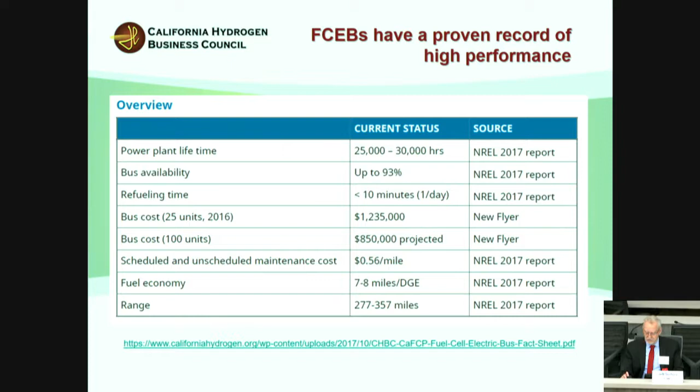So this session, having already with Jamie's session yesterday talked about the cost of hydrogen, and it is an issue that needs to be and is being addressed, this session will really talk about developing infrastructure at scale, much like the last session did for battery electric vehicle charging. We're going to talk about how that scale is developing here and elsewhere, that there are multiple pathways, we have multiple people. You notice none of the people on our panel are transit agencies, for right or wrong. These are people who are delivering equipment and services to you as potential fuel cell electric bus users.

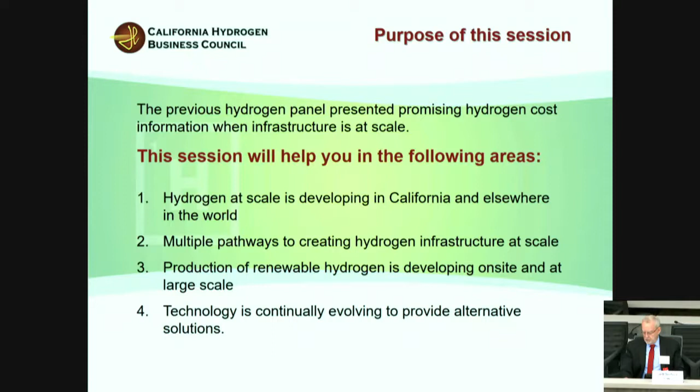The production of renewable hydrogen is developing. It's very important, and as an organization we have committed, as the Hydrogen Council, Worldwide Hydrogen Council, is committed to zero carbon transportation fuels very soon. What's the year, Jamie? 2030, I believe, the Hydrogen Council. And then the technology is developing. You're going to hear several people developing, or telling you about, their view.

So we're going to proceed with the first speaker. We want you to hear enough in this session to become convinced that fuel cell electric buses have to be part of your evaluation of how you meet the ICT regulations. So first, on my left is Chris Kretz from Air Products and Chemicals.

Chris? Okay, like that. Good morning, everyone. Thank you, Jeff, for having me on this panel. Thank you to ARB for allowing us to have this forum to talk about hydrogen and scaling up hydrogen for transit agencies. We're going to try. Okay, great.

So getting started, a lot of you may be wondering, if I was even thinking about hydrogen and fuel cell electric buses, how would I get started? There's a lot of folks here who can help you understand the buses, but just from the bus perspective, you really want to understand about the fuel cells, about the fuel cell electric bus, about the hydrogen, and know that there are a lot of agencies and companies who are willing to help you get started. And so all you really have to do is contact, from a hydrogen fueling perspective, contact folks on this panel and some of the other panels you've seen.

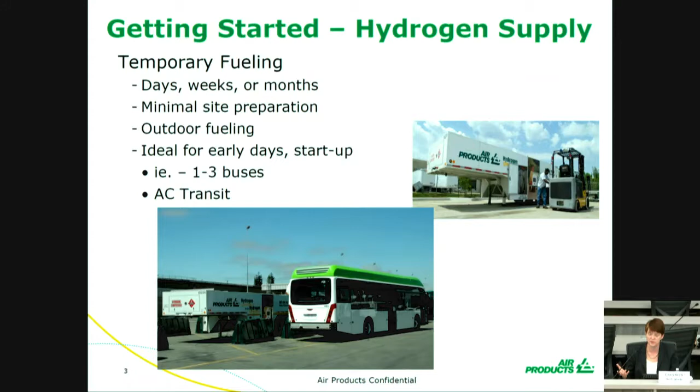I will be frank about that. But if it's meant to just get you started and try it out, it may be a good way to go. This would be outdoor fueling with minimal site prep.

Then from a scaling perspective, that's when you start to get a little more complicated. But again, I would venture to say not as complicated as some of the things I've been hearing about for other alternative technologies. There are options though, so that's where a dialogue needs to start. I heard a lot of discussion earlier and yesterday about planning. Yes, it requires planning, but we and others can help you do that by just walking through what the options are.

The options for hydrogen are liquid hydrogen, or making the hydrogen on site—whether that be reforming, electrolyzer, or even trigeneration—or pipeline hydrogen. There is also gaseous hydrogen, much like we talked about in the temporary supply, but that's probably one of the more expensive routes to go in terms of scaling up.

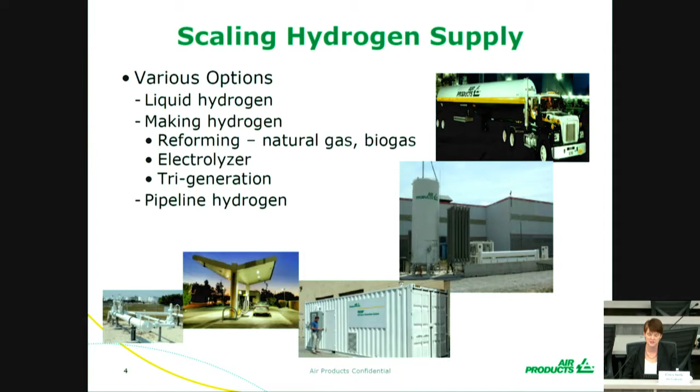I just want to point out some of the pictures on the right. That's a liquid trailer, that comes and delivers liquid to a site. Below it is a liquid station, pretty straightforward. Then below that, in the middle, is a reformer container. To the left of that is the Shell Torrance station, which we built for Shell some time ago, and it is a pipeline station. So it's not anything exotic, it's just fueling as you would see it in Shell Torrance. The last picture on the left shows you some typical pipeline setup.

In terms of what we feel is one of the best technologies for transit agencies and for scaling up—and we're a bit biased because we provide this technology and we have the supply—liquid hydrogen, delivered liquid hydrogen to a site, is one of the most versatile ways of providing hydrogen to a transit agency.

So what I've shown here is a picture you've seen previously. This is the station that Trillium and Air Products are putting into Orange County. It is Air Products' design and key equipment, and it's designed for 10 buses initially, but this can easily fill 20, 30, 50 buses. Then with minor modifications and some added equipment, it can go to 100, 150, or 200. As long as you have the footprint to put in that additional equipment, you can have a station that's expandable up to 200 buses.

The nice thing about that is it's an additive cost to you to scale up, not a multiplicative one, and I think that's an important point to think about as you're considering technologies. The planned on-stream date for this is spring of 2019, so it's in progress and being built, and I'm looking forward to seeing that online.

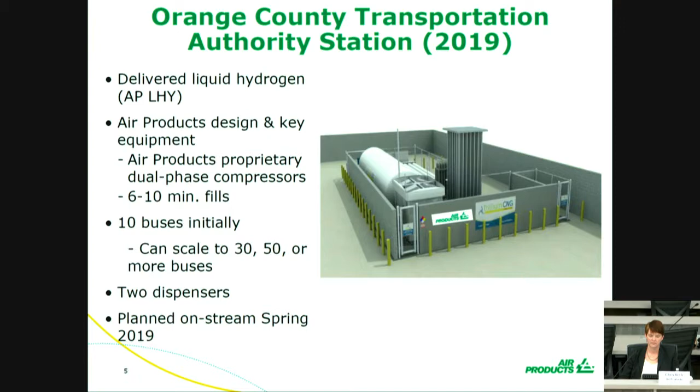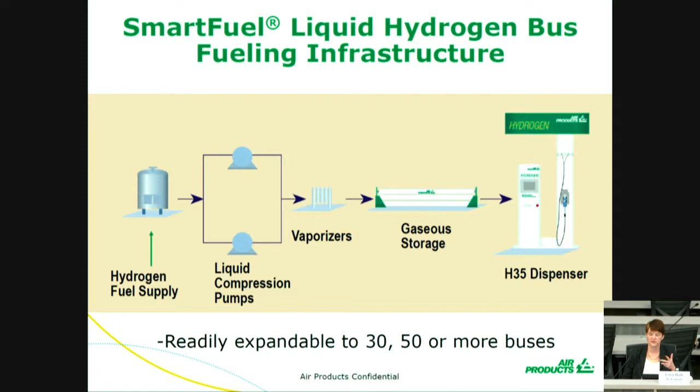If you're just looking to know what the components are of this SmartFuel station, it's pretty straightforward. It's a liquid tank over on your left, some compressors over to the right, vaporizers, some gaseous storage, and dispensers. It's pretty similar to what you might see for a CNG station—very, very straightforward and readily expandable.

If you think about a pipeline station, it actually has very similar building blocks. I think people get a little nervous—pipeline, that sounds complicated. And really it's not. You put in the pipeline, that's probably the most complicated part, I won't argue with you there. Then you have a purifier on the end because pipeline hydrogen is not at the right purity for what you might need. But everything else follows from that, very similar to a liquid or gaseous station: you have compressors, gaseous storage tubes, and dispensers. So it's pretty straightforward.

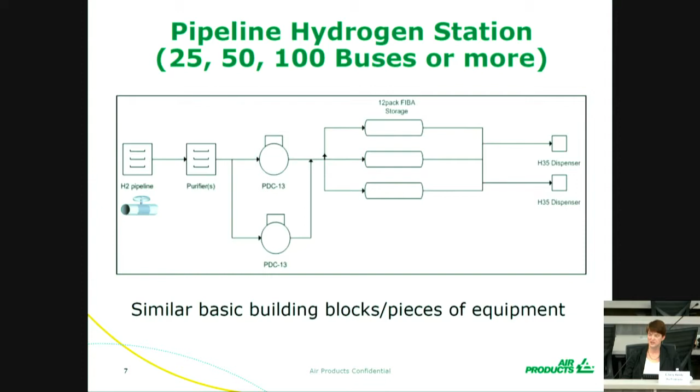And it can easily meet the needs of 25, 50, 100 or more buses.

Another option that Air Products offers is we have hydrogen generation technology at a small scale. This is a smaller version of what our plants are in Wilmington and Carson. The nice thing about that is we sell it in different modules—one for 20 buses, one for 40 buses, one for 60 buses. These are containerized packages and could be installed fairly readily because of that. It will end up taking up more footprint than a liquid station, but if you have that interest in generating on site, that is an option for you.

This can be done via on-site generation, and can also be done via electrolysis, which one of our panelists will speak to you about as well.

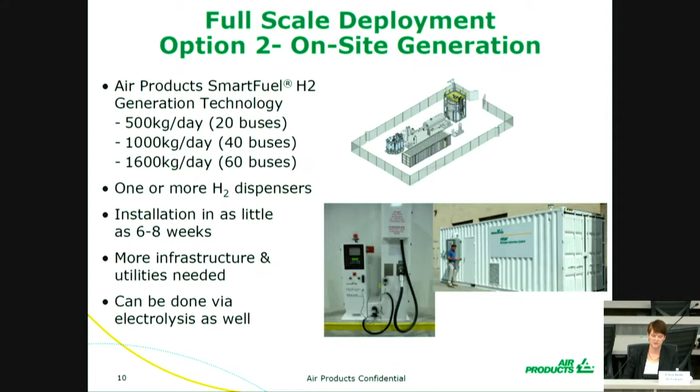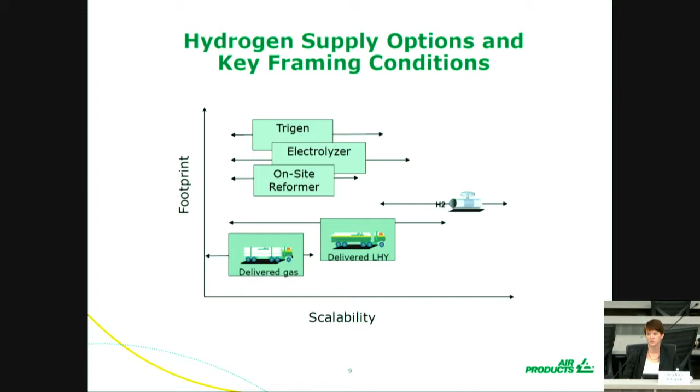Finally, the slide I'll leave you with is one I showed yesterday, but just to reiterate—some of the considerations you need to think about are scalability and footprint. What this shows you is, depending on what you have at your site, if you've got a decent amount of real estate, you probably have more options. But if you have limited real estate, you really need to think carefully if you want to scale up to larger volumes and amount of buses. And again, that's where delivered liquid really becomes a nice choice. That's it, thank you very much.

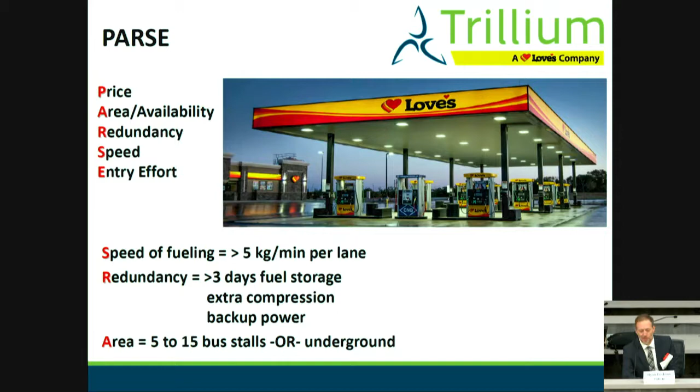The square footage these systems take, I think we can provide systems that will take somewhere between 5 to 15 bus stalls. I give it to you that way so you know what you're losing, where you'd have to move your contingency buses, or whatever. But the system can go pretty much anywhere on property, it doesn't have to go in any particular location, it's whatever's most convenient for your operations. You'd lose somewhere between 5 and 15 bus stalls. There are ways to take up less space, maybe underground systems, and I'll let other people on the panel talk a little more about that in a second.

All right, good deal.

Just real briefly, there's a lot of repetitiveness here at this point, so I'll cruise through a few slides. You have the option of having hydrogen delivered in, gaseous or liquid, or producing it on site via electrolysis or SMR. We've talked about this a little earlier and yesterday, so I won't go into it much more. Once you do that, there's the compression, storage, and dispensing that's roughly the same regardless of your choice. If it's delivered from off-site, the way it was produced is pretty much the same at a smaller scale, those same electrolysis or SMR systems.

So, can you go back a slide maybe? Thank you.

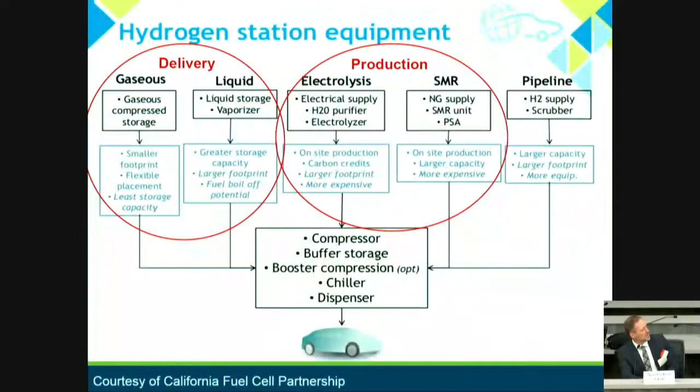So the entry effort, I don't want to spend a lot of time on this, in fact you'll see the same exact slide from Air Products. One thing I do want to say is that unfortunately, when going from a demo fleet to at scale with hydrogen, it may not make sense to have the system on day one that you want on year 2 or year 10. It might make sense to do an entry level effort, maybe gas tube storage that comes in and out on a daily or several day basis. That might not be the solution you use after your first 3 buses have proven themselves and you've decided it's time to start transitioning the fleet, and your next order should be 10 or 15 buses. So you might have a different solution for the first months and or year or 2.

And I think that should be considered okay. I think there are pretty low cost options for these lower cost entry systems. You do pay more per kilogram for the fuel, but the system itself is pretty easily installed. Not a lot of cement, civil, mechanical, and electrical work needed for those systems.

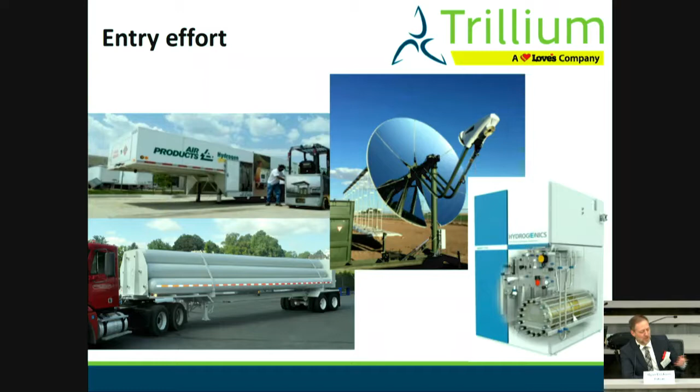So here's just a couple different examples of some systems. Again, hauling in gas is probably one of the more common ways to do it. There are some new vendors or OEMs out there producing new equipment that might be pretty cool, like solar reactors and all that kind of stuff. So let's see if I can.

And a couple more systems as well. You can get these storage tube systems where they are fully self-contained and have all their power on board, so they're really quite simple and easy to use.

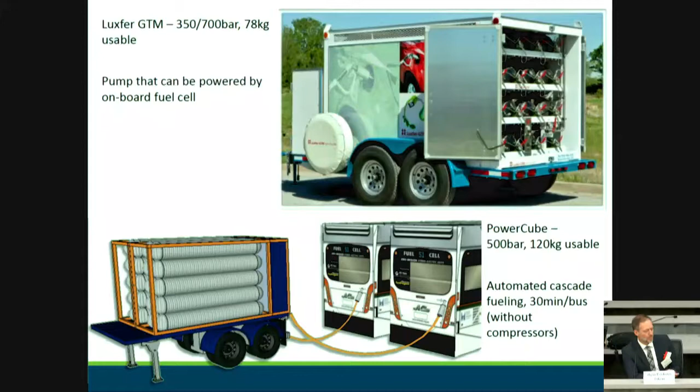Next slide, thank you. All right, so just a couple examples for scale up. This is for a customer that isn't a customer yet, but somebody we've been talking with very closely, a California Transit Agency where they have a fleet of around 180 buses on a particular site. It's a very small, very tight site. They have slightly shorter routes, so they maybe don't run quite as many miles per bus per day as OCTA does. So they would be able to do 180 buses.

That's 180 buses total with their spare ratio, fueling maybe 150 to 155 buses a day. They can do that with around 3,000 kilograms per day of hydrogen. Our solution there would be to put in 2 liquid hydrogen storage tanks and associated compressors, vaporizers, and dispensers to meet their needs, taking up maybe around 10 bus stalls.

And you can see this, maybe you can't tell what you're looking at, but the 2 long things are the tanks, horizontally situated, about 40 feet long each. Depending on where on the property and what the zoning or permitting requirements would be, you might even be able to do those tanks vertically. Chris had a picture of a vertical tank, which takes up a lot less space but is taller, so maybe you don't do that right up against the edge of the property.

But in the worst case situation, we think we would only take up about 10 bus stalls. We think that station would cost them around $6 million, and that would fuel their entire fleet of 180 buses, at 5 kilograms per minute, fueling multiple buses at a time, basically the same exact operations they have today with diesel.

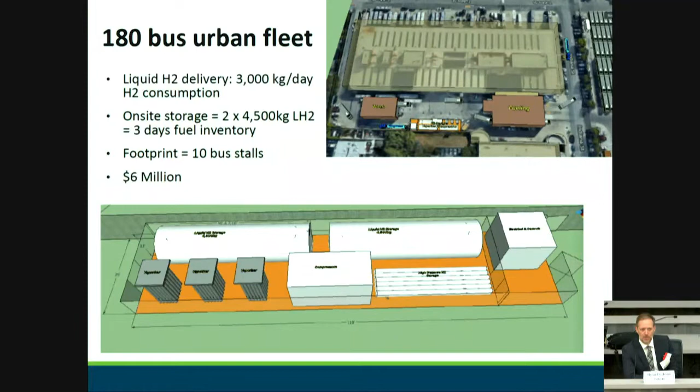And you've already seen the OCTA slide. I won't spend a lot more time on it, other than to say that site took up around 8 bus stalls. We think we could double that capacity without having to take another 8 bus stalls. That's the scalability we're talking about here. That was a $4.7 million project with CARB funding, which did include 3 years of warranty and maintenance.

So the actual CapEx costs, if we were to build that same site again without the warranty and maintenance built in, would be less than that. And then, like I mentioned yesterday, and Bill Zobel mentioned yesterday, if we had to expand that, maybe double its capacity, it would not be another 4.7 million, wouldn't be another 3.7 million, it would be a much smaller number than that to double that capacity.

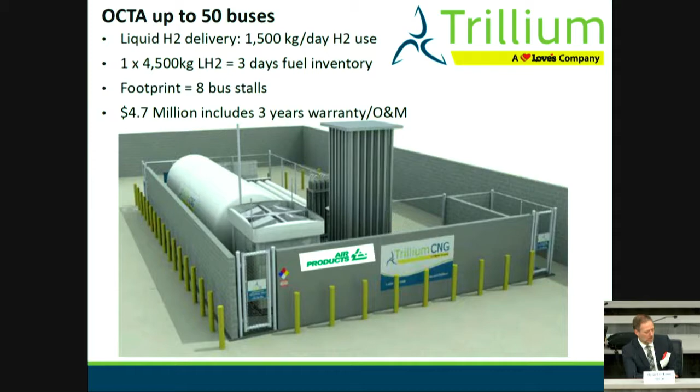That's it, thank you very much.

Great, thank you. I'd like to again thank CARB for putting on this workshop. I think this is a really, really important activity for the whole industry. I'm going to focus on electrolysis as a scalable hydrogen supply solution for transit fleets. Just on this first picture, I want to make 2 comments. I'm going to talk about centralized production of hydrogen from electrolysis and how that can work into a transit model.

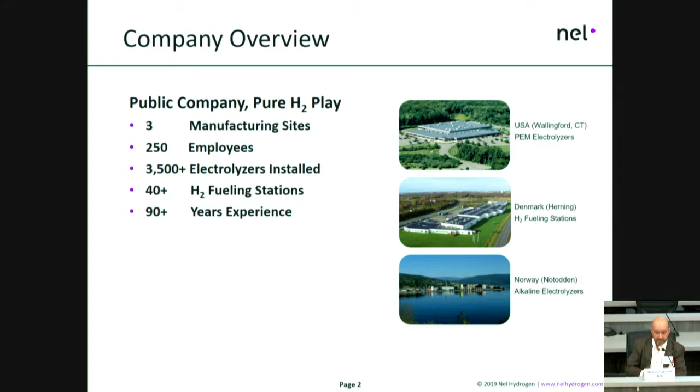Our company is based in Norway. I work at the US subsidiary in Connecticut, where we produce PEM electrolyzers and have for more than 20 years. But we also have our alkaline electrolyzer factory in Norway and a hydrogen fueling station factory in Denmark. So we actually produce not only the electrolyzer equipment that produces hydrogen, but also the fueling equipment, both 350 bar and 700 bar fueling equipment that can be installed at your fueling sites.

So just really quickly, these two cartoons show the two types of electrolyzers that we produce. Fundamentally, they do the same thing. The inputs are electricity and water. And if your electricity is coming from green, carbon-free sources, then your hydrogen is what we like to refer to as green hydrogen.

Both technologies that we produce have their pros and cons in terms of how we choose one over the other. But fundamentally, we offer a complete portfolio of electrolyzer capacities from very small to very large, as I showed in the first picture.

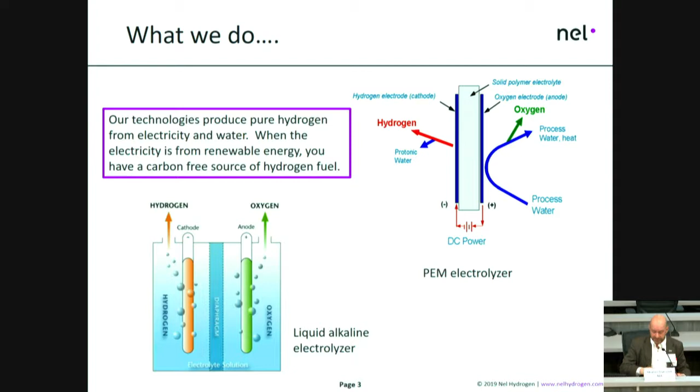So the first thing I mentioned was the modularity of electrolysis, and I'll use the example of the electrolyzer we're installing at Sunline Transit as an illustration. We're installing an electrolyzer that will produce a little over 900 kilograms per day of hydrogen at that site, enough to support about 26 buses. That particular electrolyzer system has 8 modules installed into it, so there's 8 cell stacks, and each cell stack has a dedicated rectifier to provide the DC power to drive the stack. Now, I could install half as many modules and get a 450 kilogram per day electrolyzer, and then upgrade that in the future.

So when I look at how I could grow a system like this, where you start with less capacity and add to it, you can do it very cost effectively, because the balance of plant is already installed, and now you're simply adding internal modules to that. So to go from 450 to 900 kilograms per day is less than 50% of the initial capital cost. That's just one of the ways that this technology allows you to scale on site more cost effectively.

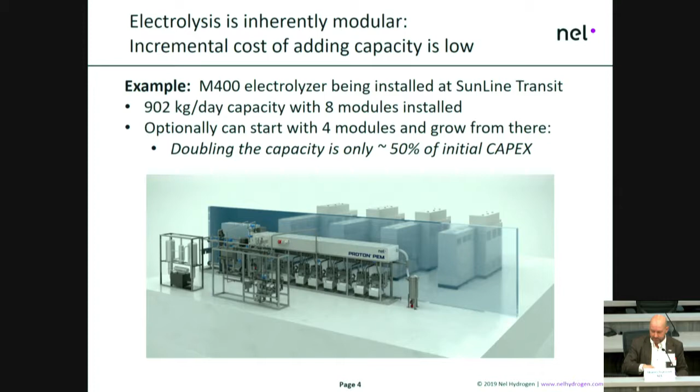So just to introduce the concept of how we think centralized production can be a cost-effective model for transit fleets. The picture at the top shows a 50 megawatt electrolyzer producing about 25 metric tons of hydrogen per day. That's enough to support about 1,000 transit buses, maybe 500 Class 8 trucks, and maybe 40,000 cars.

The difference is, for cars, I need more of a network to support those vehicles, so I need multiple fueling locations, whereas for transit and truck type fleets, I can have depot fueling where you're fueling in one location. So you get better utilization of the equipment, and more efficient management of the hydrogen supply.

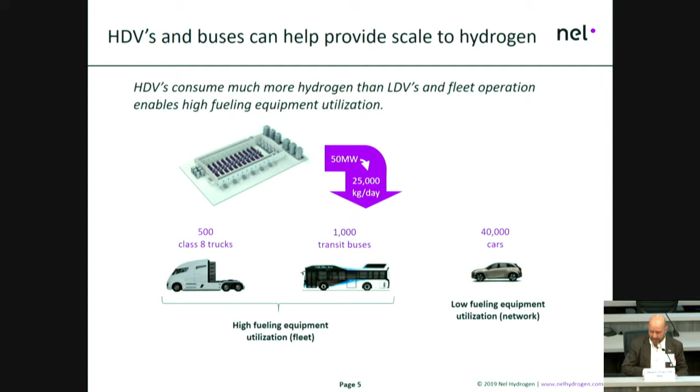So just to illustrate that a little bit, the curves at the top you've seen before, I think, where the cost per bus goes down with fuel cell infrastructure as you increase your fleet size.

And to illustrate that along the bottom, these are our projections, and I'll apologize in advance for the NOK currency - that's Norwegian kroner. 85 NOK is a little over $10 a kilogram for the conversion, just to help.

But as you go from 10 to 50 to 150, you have a nice reduction in the dispensed cost of hydrogen for your operation. So as we scale, those projections match up pretty nicely with the curves above.

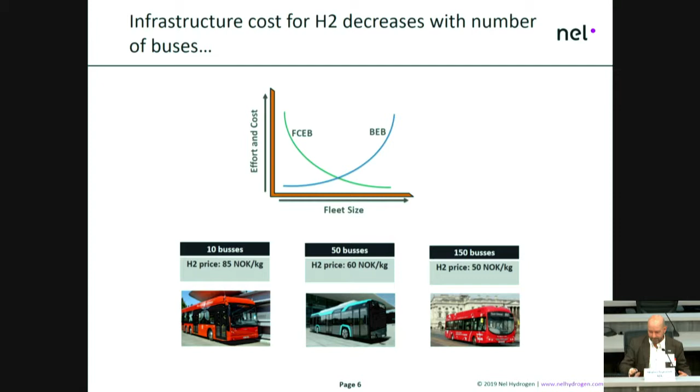So to illustrate this, in Norway we are building out infrastructure to support transit fleets there. The idea is centralized production with gaseous distribution to a perimeter of fleets. We're taking advantage of high pressure trailers that are allowed on the road there to help make it an efficient and cost-effective delivery solution.

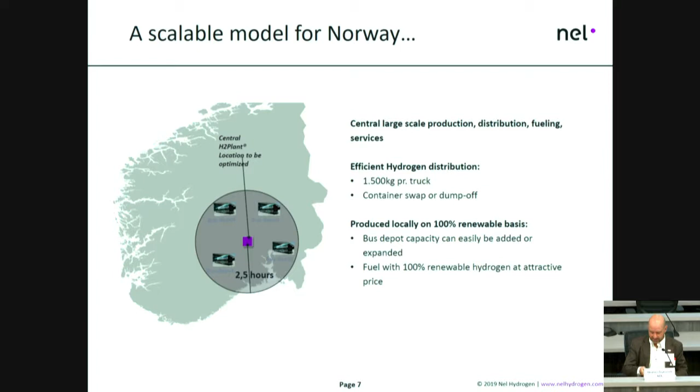So just to show you how this scales, for a relatively small fleet, say 30 buses, we're showing how the equipment would lay out. We've got this purple box that shows our fueling equipment on site, and next to that is basically a trailer lane for dropping off trailers of compressed hydrogen.

The dispensers can be remote from the rest of the station equipment - we say up to 100 meters away from your primary station equipment. So for this model here, we're talking about maybe 60 square meters to support 30 buses, just with this drop and swap kind of delivery method.

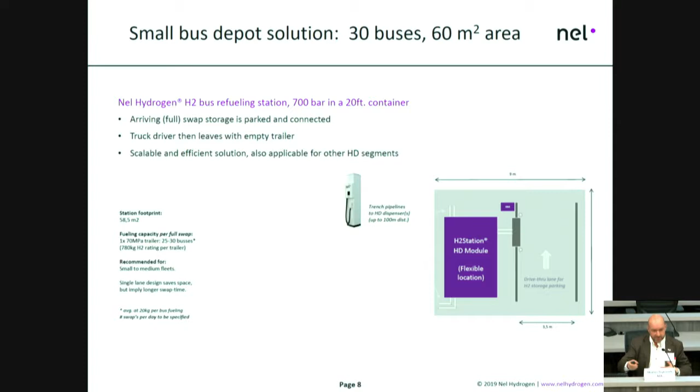Let's see how this scales up to 150 buses. The way we address higher capacity is with more trailer lanes, so you'd always have a couple trailers hooked up providing hydrogen, plus maybe a third lane always available for swapping. To go from 30 buses to 150 buses, we go from roughly 60 square meters to 200 square meters, and again you can have multiple dispensers set up remotely from the primary equipment site.

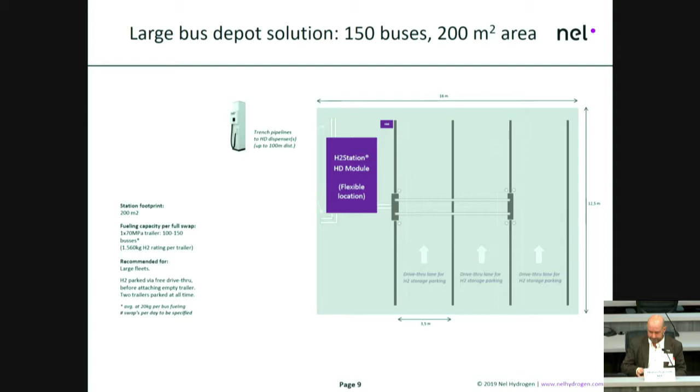The new solution is centralized production using low-cost hydropower, which they have in Norway, and we're going to be supporting up to 150 buses, about 3,000 kilograms per day. The footprint goes from 350 square meters down to 200 square meters, because we're doing this drop and swap model.

The cost goes from about 110 NOK per kilogram down to about 50 NOK per kilogram, so increasing capacity 10x and cutting cost more than in half. That's enabled by two key elements: the high pressure drop and swap technology, along with the centralized production facility of an electrolyzer.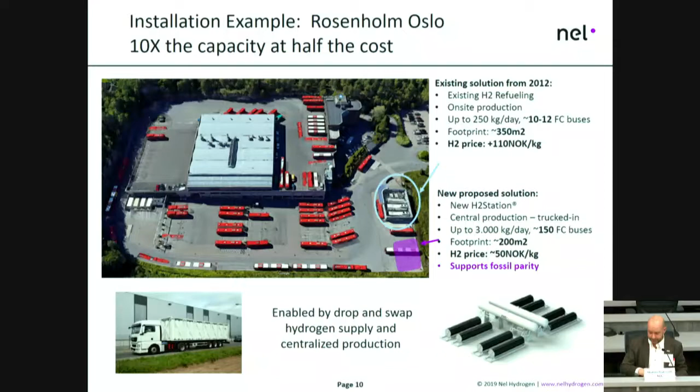Just the last slide I wanted to cover is that today, when we compare hydrogen for fuel cell buses relative to diesel, we're already very close to cost parity on a dollar per mile basis. This is just some numbers here you can look at when the slides get distributed.

Ryan talked yesterday about getting down to $5 a kilogram. If we can get down to about $5 a kilogram, we are at cost parity with diesel buses on a dollar per mile basis, and we think that is very achievable today.

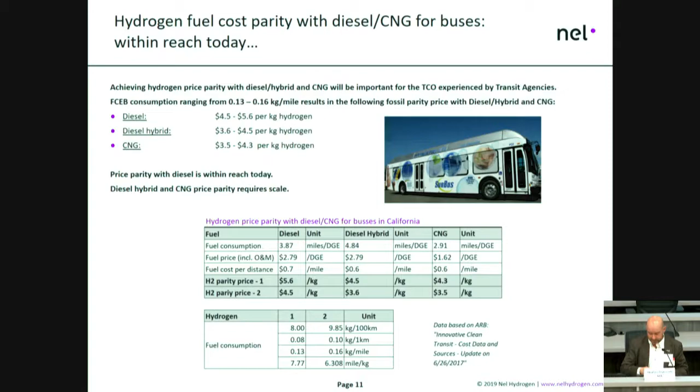Diesel hybrids and CNGs need a little bit more scale to be realized in order to get the cost down to parity. But the encouraging thing is the cost trajectories we see, and how right now we're already within striking distance on diesel buses. That's it.

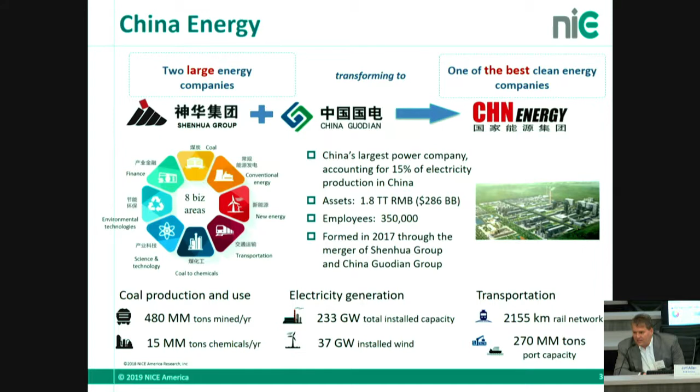One of the other interesting things—Al asked a question about curtailed wind yesterday, and I think it was a couple hundred gigawatt hours or something like that. China Energy actually has over 10 terawatt hours of curtailed wind in China. Right now it's out in the middle of nowhere, so we're trying to figure out what to do with it, and of course, utilizing hydrogen. Unfortunately in China, liquid hydrogen isn't approved for transport, so you're stuck with gaseous hydrogen, and the distance to where this curtailed wind is, is so far that gaseous isn't practical. So you really need liquid to take care of that if you were to utilize hydrogen as a solution.

So who is NICE? NICE is a group of researchers, in excess of 400 researchers over in Beijing, another 20 in the US, 150 over in Schwabisch Hall outside of Stuttgart, Germany, where we did a joint venture with a CIGS solar company. We are the clean tech incubator for all of China Energy.

So one day I'll be working on new materials based on coal byproducts like plastics. Others I'll be working on natural gas proppants. Other days I'll be working on hydrogen, carbon capture, all of the above. So we have a very wide mandate, including distributed energy, so new battery materials. It's pretty wild, a little overwhelming, but pretty fun. So we're working on various things.

It was originally constructed 10 years ago as foreign experts. So a lot of our DNA and executives and team on the senior side comes from GE Global Research, Air Products, also Dow. We have a lot of distinguished folks and tremendously experienced within our hydrogen team here in the States. We have one of the leaders who set up a lot of the stations for Plug Power, also one of the leaders who set up a lot of the stations for Linde. So we have tremendous experience base in the team we're working with here locally.

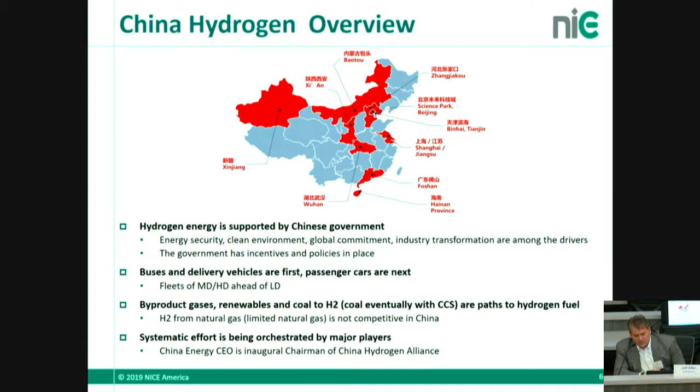So to give you some perspective on what we're working on: our aspiration is very much consistent with Ryan's, and we've done a deep techno-economic analysis. Obviously, these production numbers we're showing are more on our internal production capacity over in China. We've consulted and kept a very low-key activity with the people we want to know about us here in the States. Others we have worked through, so some of the transit agencies have heard about this concept of underground - that's actually us doing the technology there.

So we see, at the industrial gas companies and also our internal production capability, we foresee the future of $3 per kilogram. And if you now look at the rest of the bill, how it adds up, with our target of a $4.50 per kilogram pump price. So very aggressively as far as that goes, and we foresee a future where that is definitely possible, and are working on principally the production over in China and also the refueling here in the States and in China.

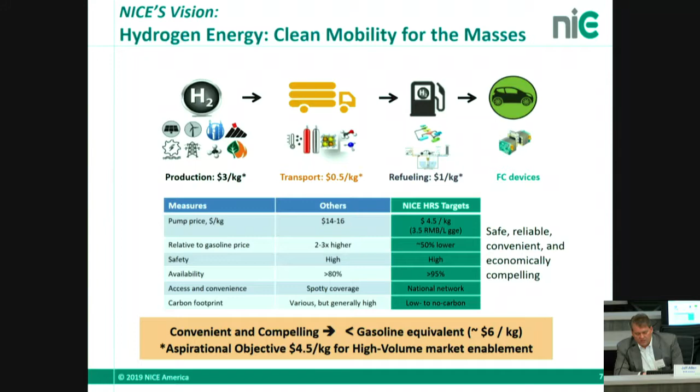So what are we doing about that? Within China Energy and NICE, we have a sister subsidiary called Shenhua Hydrogen. They are committed to building 200 to 300 hydrogen refueling stations, very large capacity refueling stations, and it's all self-funded by us. We're committed and very aggressively pushing forward that. They're all going to be 1,000 kilograms per day or more.

We're also looking at molecule production. Within the NICE portfolio, our team over in Beijing is working on gaseous infrastructure equipment development, stations for gaseous, since liquid is yet to be approved. We're also working on codes and standards and driving those codes and standards so that liquid can be approved. You can also start to consider reduction in footprints based on safety and being smart and standing on top of all of the expertise that's been created throughout Europe, the US, and Japan on safety standards and protocols for hydrogen. So we're incorporating that and pushing it forward as fast as possible in Beijing.

Here in NICE America, we're located in Mountain View, immediately adjacent to a small company called Google, in case you've never heard of them. We're working on liquid development. We have 20 folks in total. About 5 or 6 of us are working on the hydrogen team. We have some really interesting partners that we're active with.

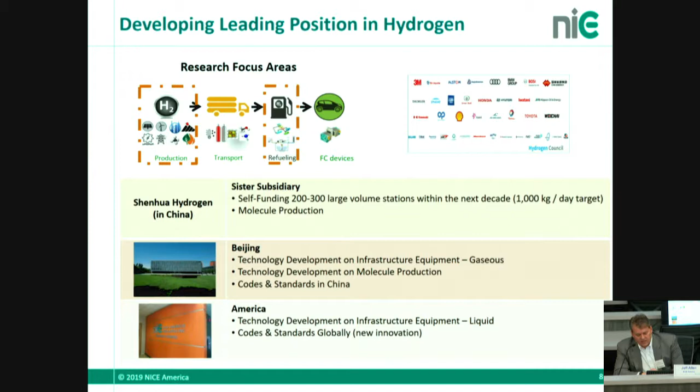Come on, change the slide.

So as I said, we're building 200 to 300 hydrogen refueling stations. Our first step into that is in a city called Jiangsu, Rugao. It is on the outskirts of Shanghai, and we're in the midst of building that station right now. It will be fully commissioned, expected spring of 2019, and the nameplate capacity is 1,000 kilograms a day, with 586 kilograms of on-site storage and the remainder being drop and swap.

The equipment utilized for that is principally Air Products equipment, and you can see it's a dual pressure capacity. So it's principally for local transit agencies, but definitely for consumers, although there's not a lot of light-duty vehicles in China currently for hydrogen. They're in development by various companies like SAIC, BAIC, Great Wall Motors, and various companies that are producing those right now.

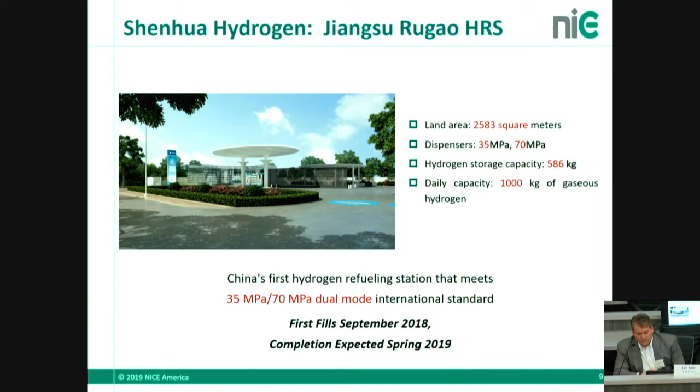So, as I said, our vision at NICE America is actually a full station transformation. We are pushing underground technology. As Ryan and Steve and Chris said earlier, what this means is if we can implement this, and we're in technology development, so it's not done today, and I will not try to sell it to you yet today, but this is our vision, what we're implementing, and we have tremendous partners that as we get a little further forward.

I'll talk about the names, but the entity we're principally working with where we're getting our liquid hydrogen pump is utilized on virtually all of the large heavy-duty truck LNG systems. So it's extremely well known and very trusted in the industry. We foresee underground as the future.

The beauty of it is now you can take a station that has 8,000 kilograms capacity or much, much larger, and now have roughly, for an 8,000 kilograms a day station, roughly a footprint above ground of about 20 by 10. Because all you have is hydraulics, control systems, and a vaporizer. Nothing else. Compressor's gone, cascade tubes are gone. All you have is a tank and the pump and tank concept.

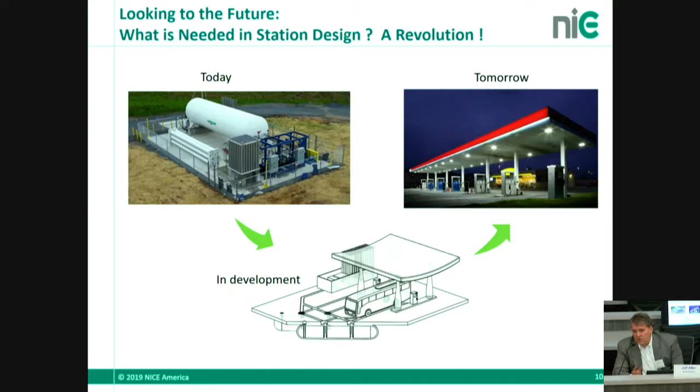The beauty of that is now you have a pump and a technology where you have zero boil off. So if you check the boxes and look at what is the required transformation to enable, independent of the cost, obviously, if you look at the station specifics, what are they? You want something that's high reliability. A lot of it today is good equipment, but it's in the early stages. And now as this industry matures, you'll see the transformations.

And the goal for us, both from a footprint standpoint, from a user standpoint, and also a performance standpoint, is the same as your diesel or LNG based buses. That is the goal and the vision we have, and we're driving towards right now.

Further, profitable station, obviously dollars per kilogram and very large capacity, and zero boil off, so it tremendously improves your OpEx. Minimal footprint above ground. Because we eliminate cascade storage and the like, we're doing direct fill, very fast fills. Our pump capacity is targeted at 230 kilograms an hour, and because it's in the cryogen at all times, you don't have a remote location where you're mixing between gas and liquids in the pump, and therefore slowing down the speed of pumping.

Can you wrap? Yeah, wrap up. Okay.

I would if the slide would move.

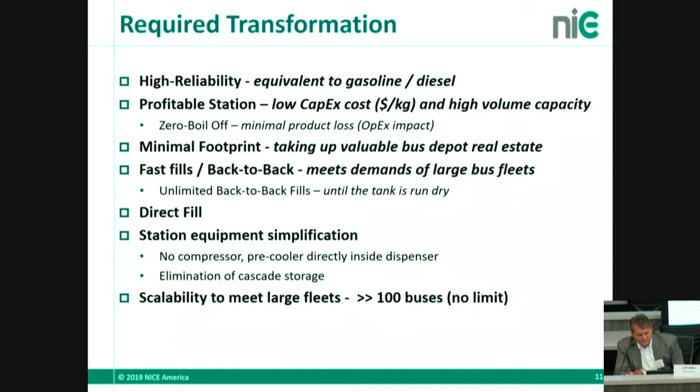Our initial iteration is for a bus application, so 35 MPA dispensers. Above ground, our technology development timeline, we're going to have our equipment complete and start testing in Q3 this year. We're going to look to do a demo station middle of next year.

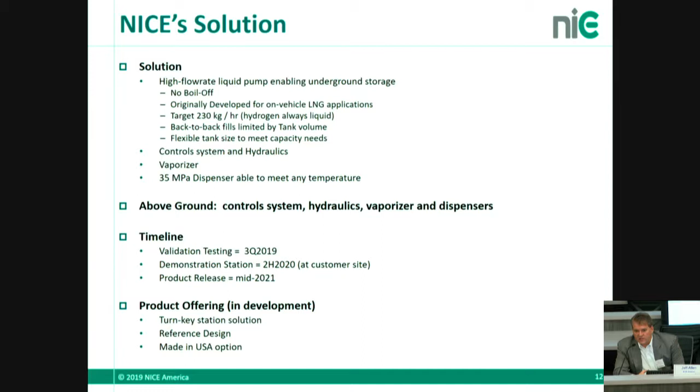Can't guarantee it will be in the States, but more than likely given the liquid limitation. So we are considering, exploring, and thinking about who we might want to partner with to do a customer-sited demo. We're also, of course, going to have Made in USA so that it meets the needs of the local transit agencies.

One last thing I'd like to say, and this is something we're working on in conjunction with California Fuel Cell Partnership, is we think this transformation and vision is the future of the entire industry. We'd like to make a call to arms of people who would like to partner with us and work with us to really deliver on this vision.

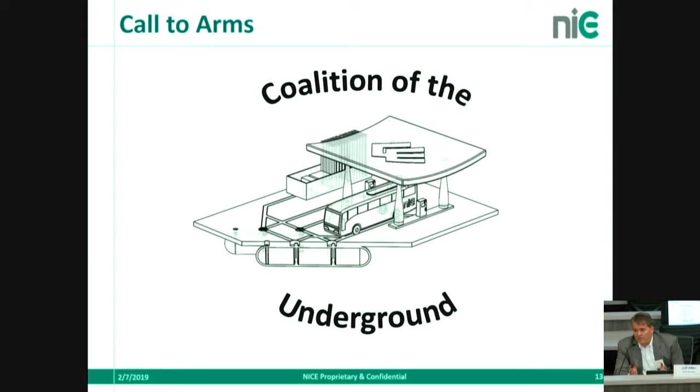The leading light-duty folks very much believe in this, but also as I talk to various people, including some on this panel, everybody sees the vision and agrees that this is the future of the technology. So we'd like to push this out in a non-commercial way and get as many people, including transit agencies, involved so that we can move as fast as possible to deliver on this vision. Thank you very much.

Who is Plug Power? Many of you know who we are, some of you don't. We are a leader in hydrogen and fuel cell technology. Our business, and we're about to announce results, our revenue for last year is going to come in just north of $180 million. That is primarily in two areas: supplying fuel cell hybrid electric drives to forklifts, to material handling business, and also providing the fueling infrastructure that supports that.

Those two go hand in hand. If you take anything away from this discussion today, understand that the infrastructure is closely related to the vehicle technology, and one doesn't happen without the other. You've heard everybody make that point very poignantly, and that is very key to Plug Power's evolution and to our claim that we have this capability, because we had to get into the hydrogen fueling business.

We had to get into that infrastructure because our customers, you'll see in a moment, demand mission-critical type of operation. We cannot miss a single fill. We cannot go down a single minute. It just can't happen. A couple of numbers here.

We've got 25,000 plus fuel cells operating in the field. We've accumulated over 200 million operating hours on those fuel cells. We have done to date 16 million plus fills, and we do like 15, 20, probably more now, it's more like 25, 30,000 fills per day. Individual fills into hydrogen tanks. We've dispensed in excess of 10 million kilograms of hydrogen in our existence, and that is going up by about 20,000 to 25,000 kilograms a day. Those kind of numbers, I haven't heard anybody in any forum that I've ever attended talk about those kinds of numbers.

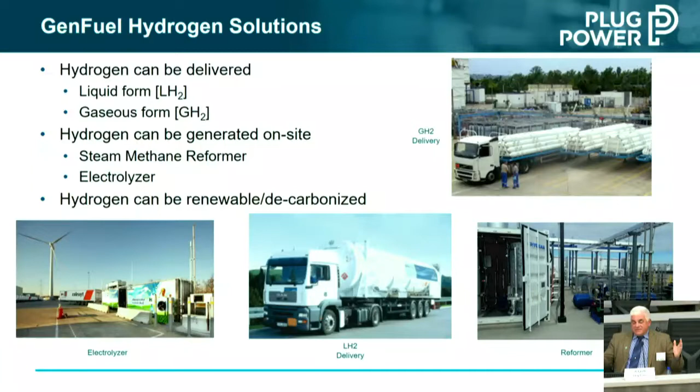We don't produce any hydrogen, we buy hydrogen. We have just surpassed NASA as the largest consumer of hydrogen in the US for fuel. We buy more hydrogen for fuel than anybody else does. So we've got lots of experience doing this. To the extent that hydrogen suppliers decarbonize their hydrogen supply, we would welcome that, because our equipment doesn't care where the hydrogen comes from, as long as it meets the purity standard.

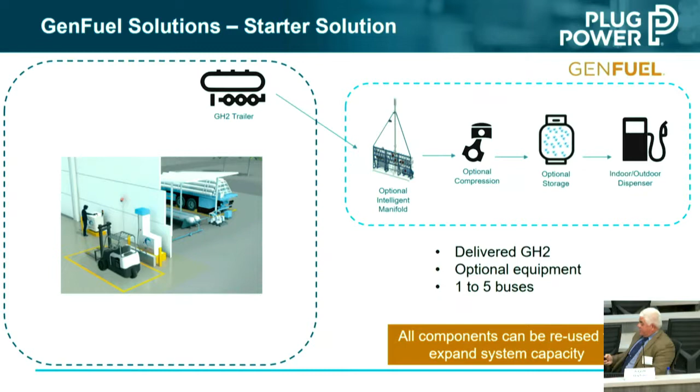If you want to completely empty that tank, because we're talking about pressurized gases here, you probably want to add some compression. That compression will stay behind and be used as you expand the system. Now, the other item I want to specifically point out is that little gizmo right there, the intelligent manifold. That manifold is also modular, and each section occupies the same physical footprint as perhaps two adults standing next to one another. So it takes up very little footprint, but it allows us to accept hydrogen from any source simultaneously on site.

So you'll see here I've got the fleet expansion, all right? If you're going to expand and go beyond a certain number of buses, the next logical step would be to get delivered liquid hydrogen, as many folks have talked about here. Well, we can take that tube trailer and leave it in place, either expand the manifold or use existing ports on the initial manifold, and bring in a liquid tank with an evaporator. There's a photo of something like that, very similar to the photos you've seen, and all of this works together. Our experience is this provides the lowest capital cost and the lowest per kilogram cost for the hydrogen fuel.

That's today, okay? I'm very encouraged by some of the technology discussions I've heard and some of the future work going on here. We have all the confidence in the world that the hydrogen supply industry will respond and will meet some of these $5 and sub-$5 per kilogram targets. And when that happens, certainly at the dispenser with our equipment, we would see those same kinds of numbers.

But the point here is that all of that compression and storage, should you install it, all of that manifold will accept different pieces. And that tube trailer can now stay behind as a backup system, because your liquid tank will need some maintenance, your compressors on the liquid tank will have some maintenance. So having the ability to build on the investment already made, leaving that behind, addresses the R that Jamie talks about in the PARSE acronym, about resiliency, redundancy, and reliability. This fits that, this accomplishes that.

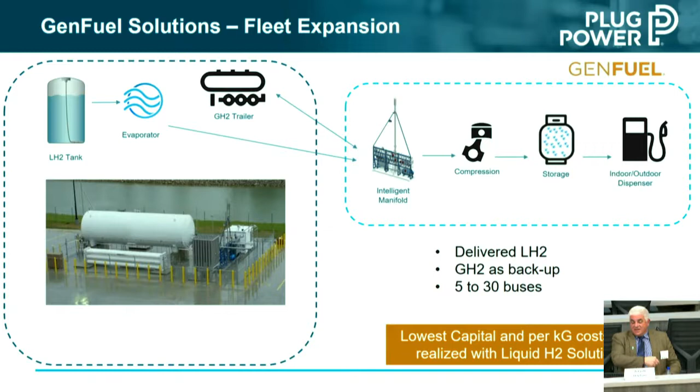If I could advance, there we go. So now you're going to expand again, and just having a liquid tank isn't going to do it. Or perhaps you have a preference for on-site generation because you have access to very low-cost stranded wind energy or stranded renewable energy, or you have access to biogas, so you're going to put in a steam methane reformer or an electrolyzer. I've shown here as only one of the two, because initially you would probably pick one of the two, but they can be blended.

As I said, our intelligent manifold will blend all of these together, okay? This is a green solution, all right? And when we can get liquid hydrogen delivered from green sources, that'll be a green solution as well. But you can scale this up, and now you can see this is a solution where you can get up into the tens of buses, perhaps, and I'm being a little conservative here, but this will probably support 50 to maybe 75 or 100 buses.

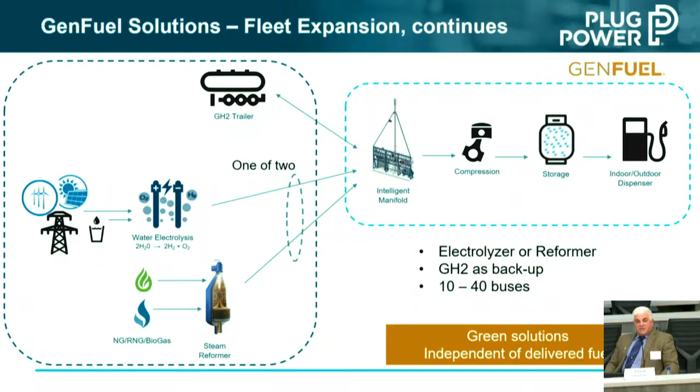So now, you're really going, your entire fleet is going to be converted. You're talking about hundreds of buses. Now, you can take all of these, and again, I say one of the two, electrolyzer or reformer, it can actually be a blend of all of them. You can have multiple electrolyzers, you can have multiple liquid tanks, and all of the investments that were made along this journey stay behind. It is an additive process.

A starter set, theoretically, can cost $0 down. That has to come with some kind of a contract for supply of hydrogen, at some kind of a price, but that's more of a pay-as-you-go model, as Steve mentioned. For a few hundred thousand dollars, we can probably get you started at a more modest hydrogen molecule cost. Those investments stay in the ground. These things will scale up to several million dollars.

But our solutions are quite cost-effective because, I forgot to mention this, we have installed 80 hydrogen fueling stations of this kind. Anybody who's interested, I would invite you to tour a system that looks very much like this photo here. It's a reformer and a liquid hydrogen tank on site with a gas tube trailer section. Interestingly enough, the total hydrogen demand for that facility is about 400 kilograms a day. The reformer is sized for just over 200, and the liquid tank is supplying just over 200. So we're blending those sources of hydrogen so that there is no one dependency on one or the other.

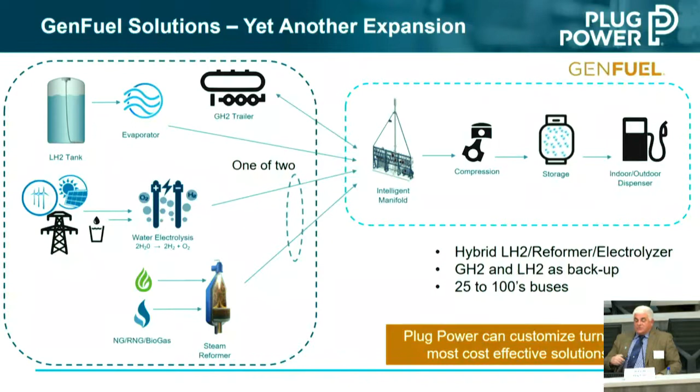Again, the liquid pumps will need maintenance. The reformer will need maintenance. And having the ability to bring that gas tube up and to provide that kind of backup when they're both out is very important.

Sure, I will get to this last item right here, and this is where we have all of our experience put together in one package. We call this the GenKey Program. Our material handling customers and our manufacturing customers are very familiar with this. We will come on site and we will plan, design, permit, construct, commission, start up, load in and close out, and turn over to you a station.

We will also do ongoing maintenance and support. Many of our locations have on-site technicians. Our on-site technicians are there because it's just that critical. The lead time for this, literally, is about 16 weeks. If you've got a permitting process that takes a little bit longer than that, we allow about 6 to 8 weeks for the permitting. So after the permit's done, if we really had to, we can get it up and running in about 8 weeks.

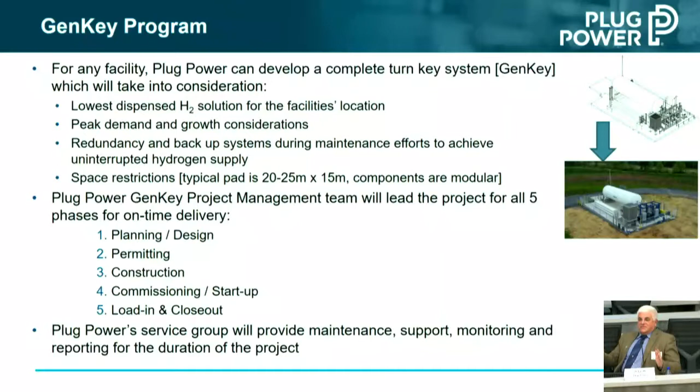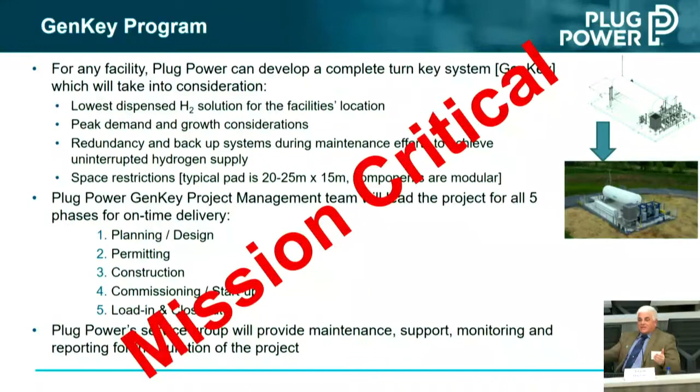So I've heard talk about 3-year planning cycles and having to deal with your local utility. That is just non-existent in this world. We don't need to do that. And the last thing I'll leave you with, again, is that our customers depend on us for mission criticality. Your buses have to run, just like materials have to flow through an Amazon website, warehouse. This is the kind of capability that we believe we can bring to the transit agencies. Thanks. Thank you.

Okay, so we have a few minutes. Instead of taking the moderator's prerogative to ask the first questions, I don't feel like I need to do that.

Because I feel like the points I wanted to draw out, having to do with the complexity of building out a battery electric structure, can be contrasted with the simplicity of hydrogen infrastructure. But there are complexities with hydrogen too, because there are lots of options in terms of supply, international lessons to be learned, and the time to get started building a station, whether mobile, temporary, or a fast-build station by a manufacturer mass producing stations. All of those options have come out here a little bit.

So I'd like to just have the microphone ready. You're ready? Please fire it up.

Hi, Ray Pingle, Sierra Club. First of all, I would like to really commend the Hydrogen Business Council for their recent policy target of 100% zero carbon hydrogen fuel by 2030. So that's awesome. From our perspective, fuel cell technology is good technology.

It's all about the fuel, and there's good hydrogen and there's bad hydrogen. So I'm very encouraged by basically all the vendors starting to talk about it, some moving more quickly than others. But I would just encourage the industry to really transition as quickly as possible to carbon-free hydrogen.